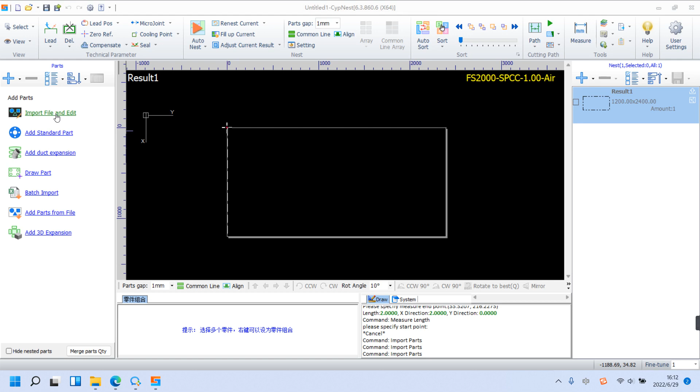DWG, DXF, LXD and LXDS formats are supported in CypNest. Mostly we import and edit parts, since we need to modify the drawing. And this is when parameters auto-optimization can be of use.

It consists of 3 parts: drawing optimization, mapping, and inside text identification. In the first part, drawing optimization, we've got features of remove trivial, remove duplicate, connect near, auto smooth, and phrase direction, and so forth. I'm gonna take remove trivial as an example.

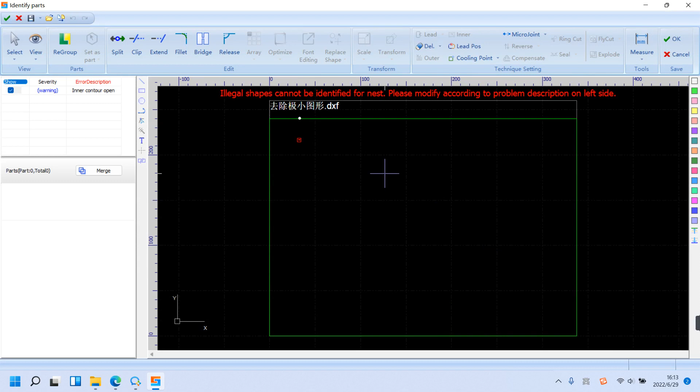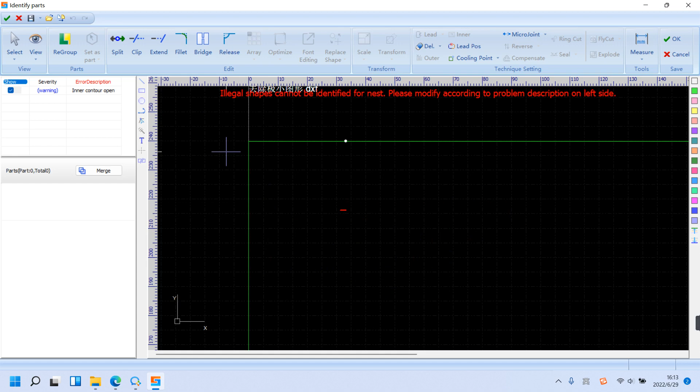Start without selecting this feature. Import the file, and we find there is a trivial line, which is, let's see, 2 millimeters long. So we can quickly remove the unwanted line by selecting the feature as we import the file. Let's import the file again.

Get it selected and set the trivial size as 2.1 millimeters. And it's gone. Even if sometimes they are too small to be found, checking this feature will leave you no worries. For your information, when the file is imported with no errors identified, it will automatically turn into parts.

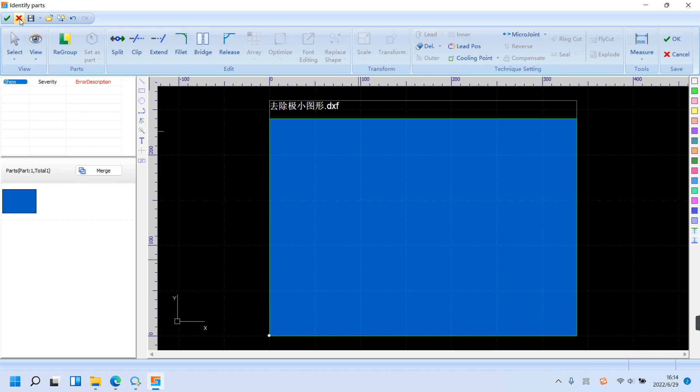The second part is mapping, which includes 3 functions: mapping by color, layer, and their mixture. And here we also have graph replace. Generally speaking, parts have different ways to get processed. They can be distinguished by color or by layer. Let's take by color.

At first, we import parts, choose mapping by color, without any changes on how it is processed. We get a part with 2 rings to be cut, and here also we have a square.

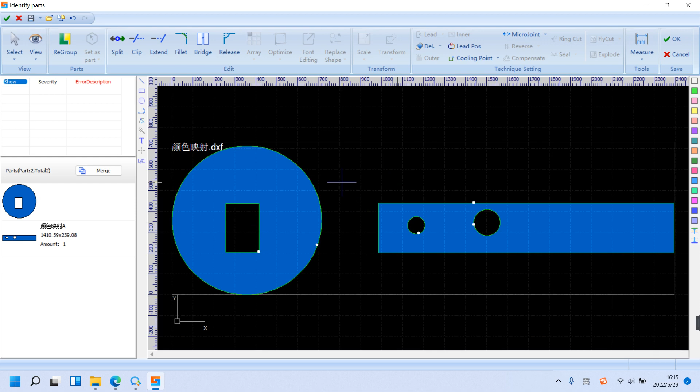Now we import the same part again, with the red color set as marking. See, we got a part with rings and a square, with the square to be marked. This is how it works.

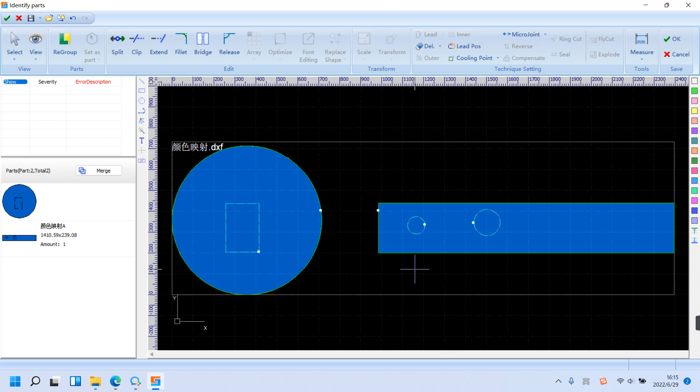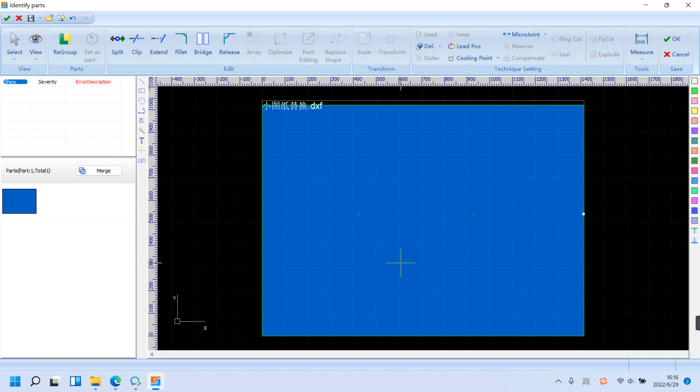The next is graph replace. In drawings, figures like small circles often represent certain marks. Also, we start with importing the file without graph replace. It's a square with 2 small circles, 10 in diameter. We will get a part exactly the same as its drawing.

Then let's try this feature: auto replace small figures. The small circles are 10 mm in diameter, so the range should be at least 10. Let's replace them with little crosses. So the figure has changed, with 2 marking crosses on it.

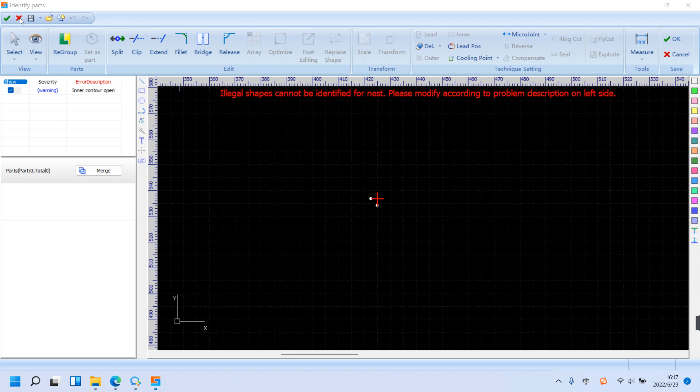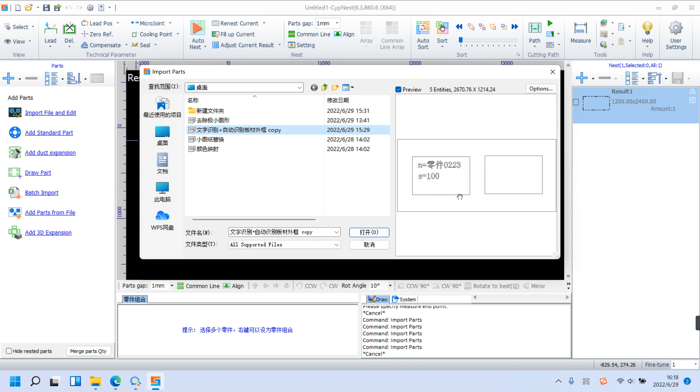Let's proceed to the next feature: inside text identification. First of all, input text n equals part 0223 and s equals 100. N represents the part's name and S is the part's number. Input the information when we draw figures.

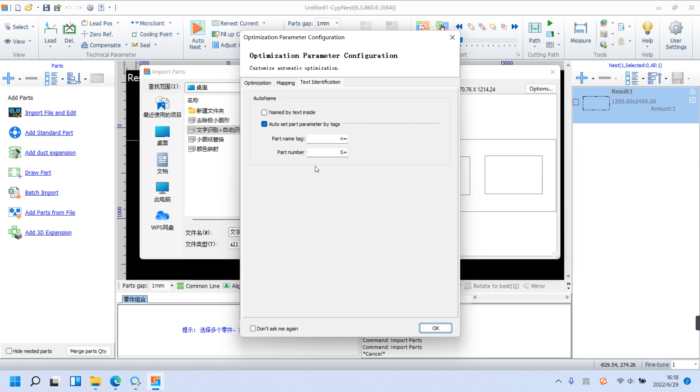And then we get this: auto set part parameter by tags. Select it to input the letters that represent name tag and number as we import the file. Now look, we got 100 parts named part 0223.

As we can tell, this feature will definitely bring us convenience in counting parts, especially when there are various kinds of them. We can do it in seconds, no worries about counting wrong. That's all about parameters auto-optimization.